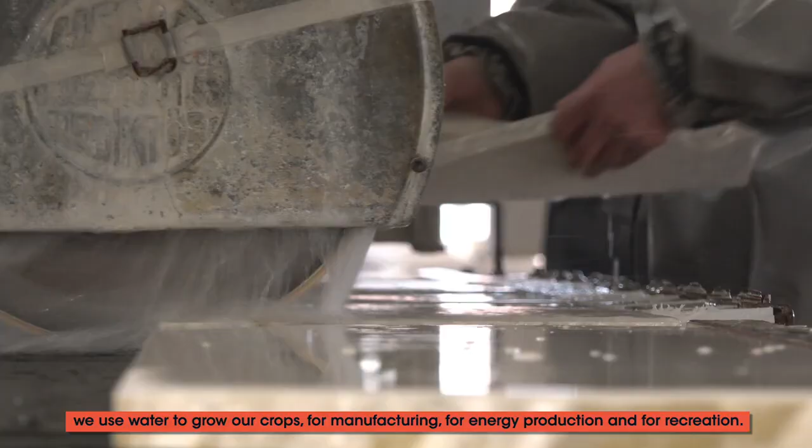Access to clean and safe water is essential for a healthy life and a fundamental element for the growth and prosperity of entire communities. Other than drinking, cooking and washing, we use water to grow our crops, for manufacturing, for energy production, and for recreation.

However, still today about 2.1 billion people live without access to clean and safe water.

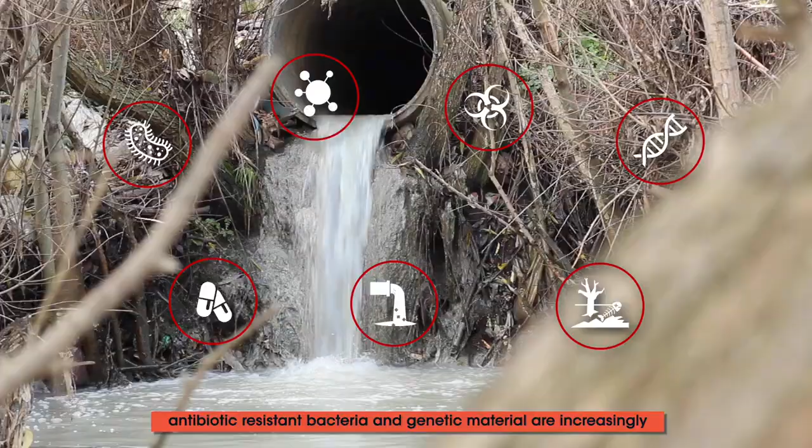Heavy metals, harmful chemicals, pharmaceuticals, nanoparticles, pathogens, antibiotic-resistant bacteria and genetic material are increasingly being detected in water bodies around the world. In the poorest regions of the planet where water treatment is incomplete or absent, contaminants can bioaccumulate in the food, the soils, and in the drinking water.

Efficient and affordable water treatments capable of removing these types of contaminants from wastewater and raw water are therefore urgently needed. PANIWATER is one of the joint European-Indian water cooperation projects funded by the European Commission and the Indian Department of Science and Technology under the Horizon 2020 programme.

18 partners from industrial and academic organizations are collaborating on the development of 6 technologies for the removal of contaminants from wastewater and raw water.

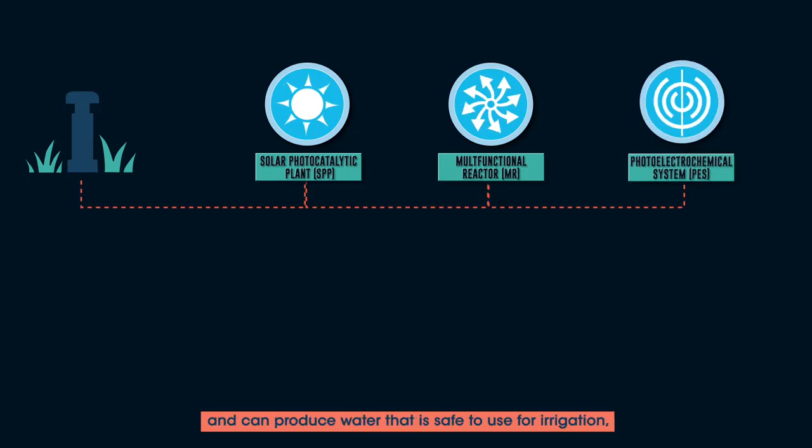3 of these technologies are designed for wastewater treatment and can produce water that is safe to use for irrigation, landscaping and industrial applications. The remaining 3 technologies are for raw water treatment and can produce water that is safe for washing, cooking and drinking.

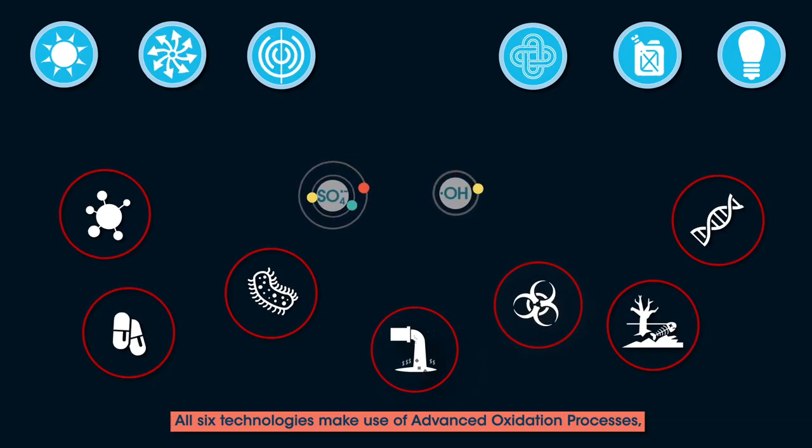All 6 technologies make use of advanced oxidation processes, which destroy contaminants by using highly reactive radicals obtained from oxygen-based compounds. In PANIWATER, those processes are triggered mostly with energy obtained from renewable sources, such as sunlight.

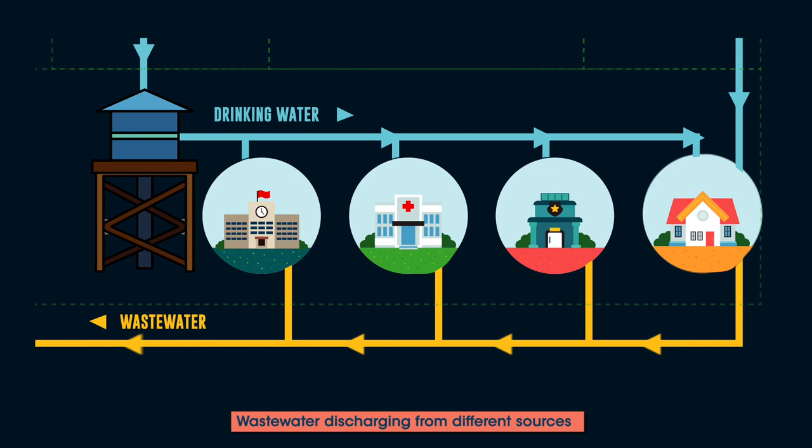Wastewater discharging from different sources such as public buildings, hospitals, factories and houses goes normally through primary and secondary treatment for removing debris and bulk contaminants. The PANIWATER wastewater technologies function as tertiary treatment to be used at the point of entry.

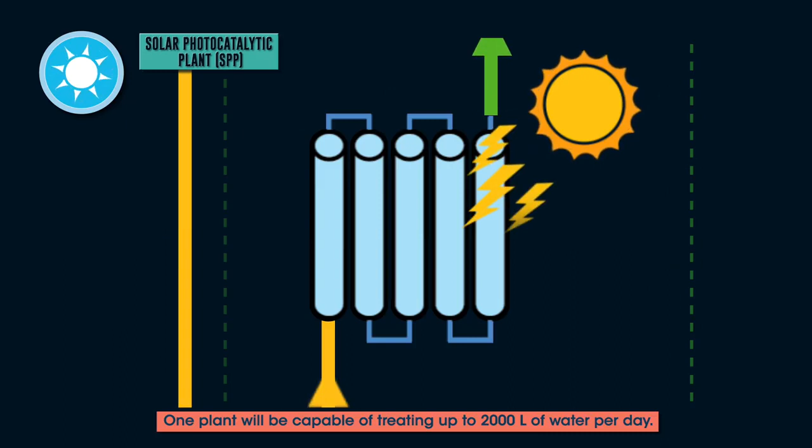The solar photocatalytic plant triggers the oxidation processes by exposing the wastewater to sunlight and consequently ultraviolet radiation. One plant will be capable of treating up to 2,000 litres of water per day.

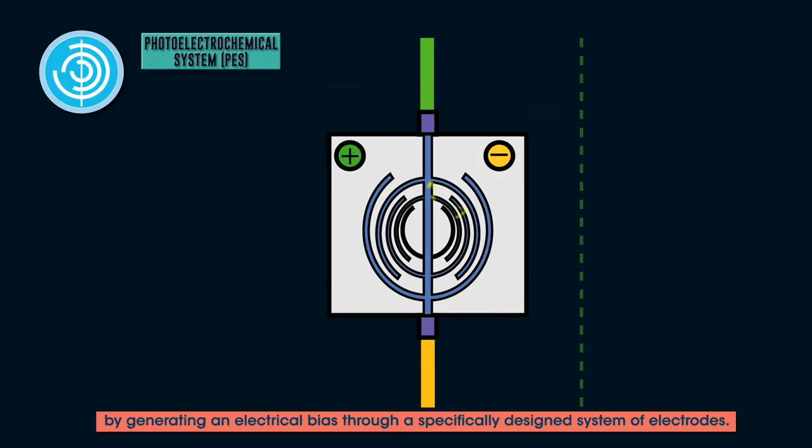The photoelectrochemical system triggers the oxidation processes by generating an electrical bias through a specifically designed system of electrodes. It can treat up to 100 litres of water per day.

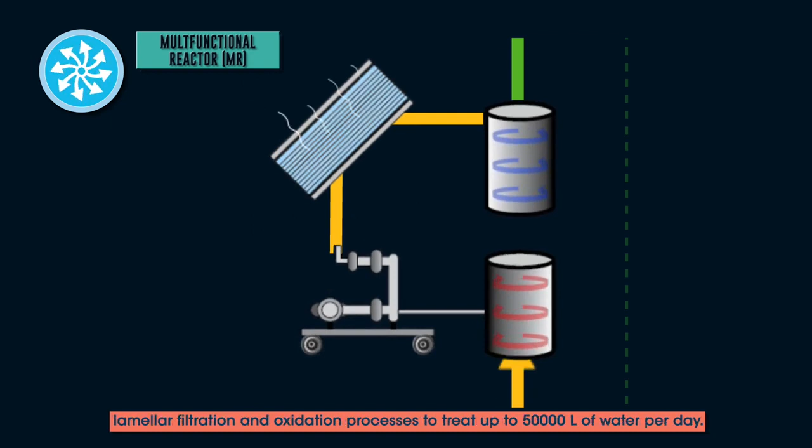The multifunctional reactor integrates automatic mixing and dosage, lamellar filtration, and oxidation processes to treat up to 50,000 litres of water per day. After tertiary treatment, the water is safe for landscaping, industrial applications, and irrigation.

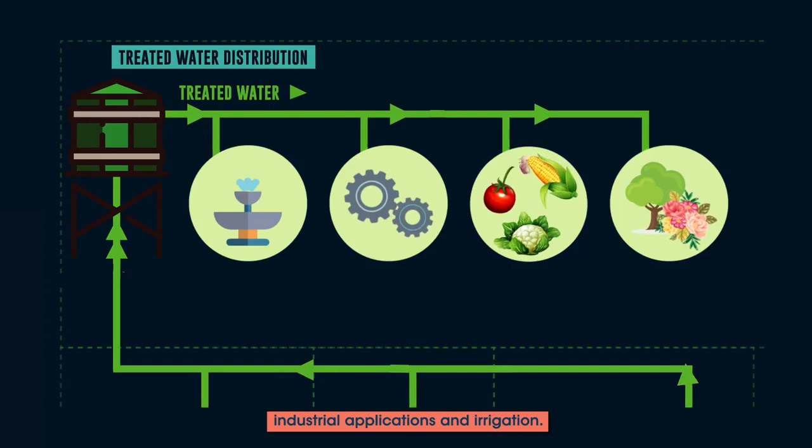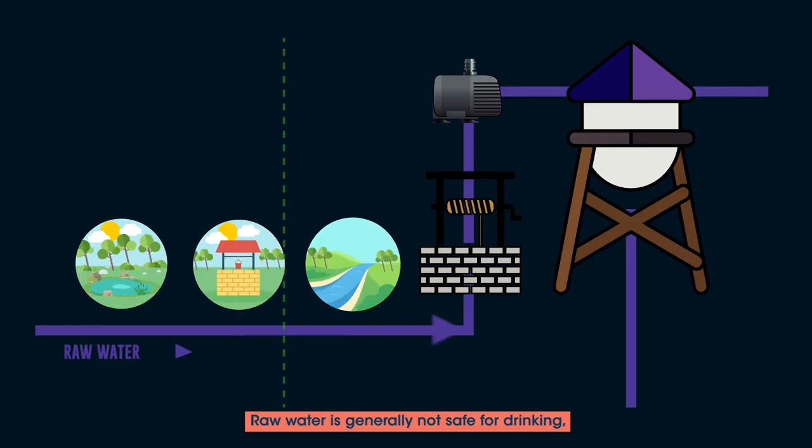After usage, municipal water goes back to wastewater treatment, while runoff from crops can make it into the water table and is added into the raw water pool. Raw water is generally not safe for drinking, especially if coming from unsafe sources such as ponds, rivers and unprotected wells, and requires treatment. There are 3 PANIWATER technologies set to do that.

The Eod system combines electrocoagulation, oxidation and chlorine disinfection to produce 2,000 litres of drinking water per day.

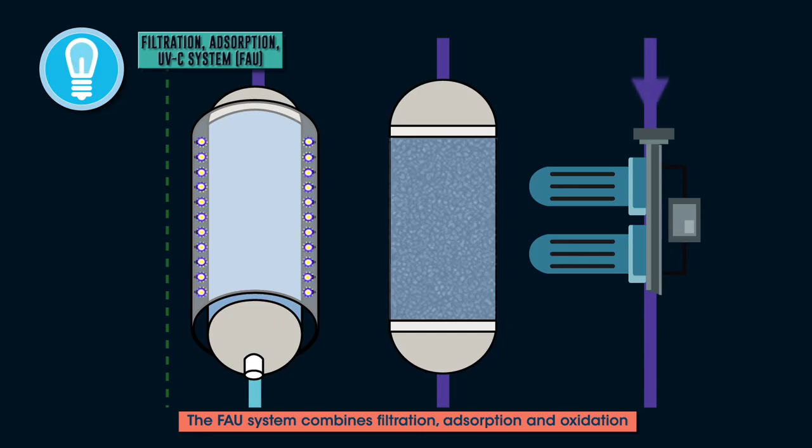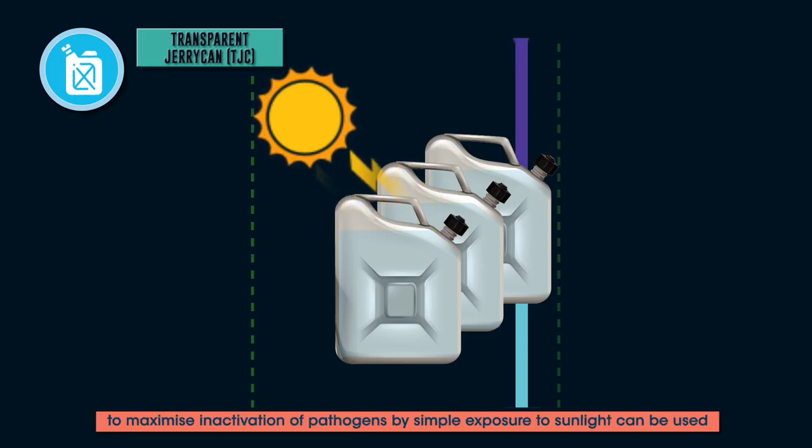The FAU system combines filtration, adsorption and oxidation by exposure to ultraviolet LED light to produce up to 300 litres of water per hour. Finally, transparent jerry cans made of materials suitable to maximize inactivation of pathogens by simple exposure to sunlight can be used as an affordable solution for household water treatment and safe storage.

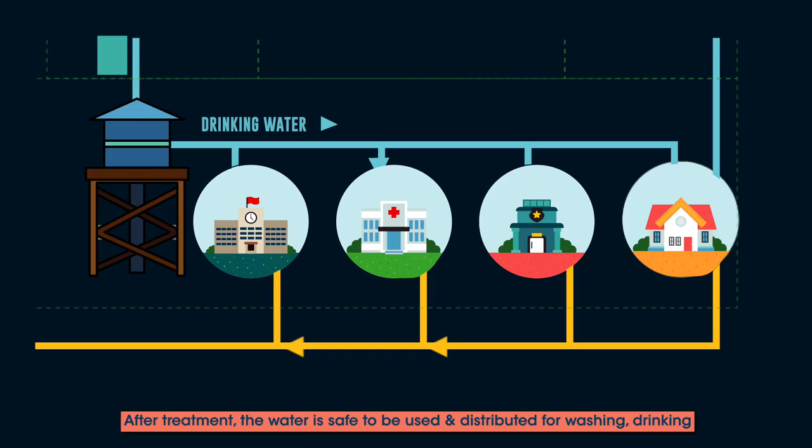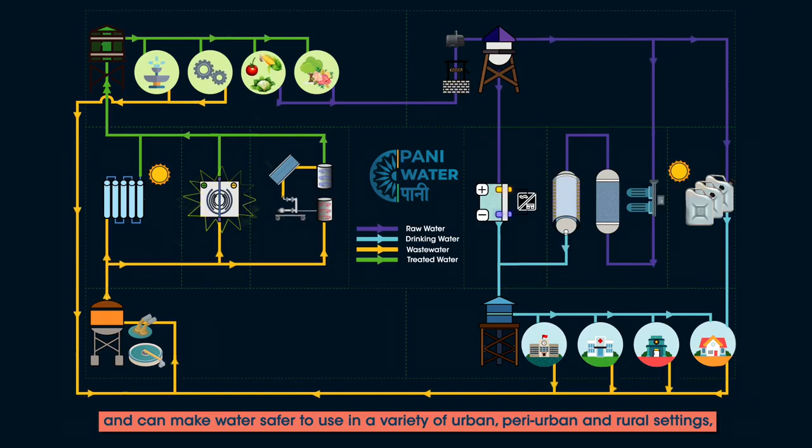After treatment, the water is safe to be used and distributed for washing, drinking and cooking in communities and individual households. Altogether, PANIWATER provides an integrated approach for water treatment at point of entry level and can make water safer to use in a variety of urban, peri-urban and rural settings, including in resource-poor regions.

The technologies are being tested in water-stressed peri-urban and rural areas in India with the support of the local communities and through participation of expert social scientists.

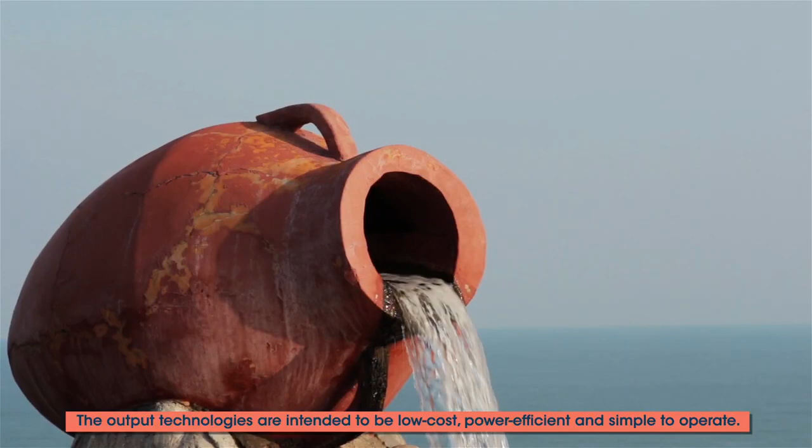The output technologies are intended to be low-cost, power-efficient and simple to operate. Their successful dissemination can contribute to strengthening the local economy and improving public health in low-income communities in India.

The United Nations recognizes access to safe and clean water as a human right. PANIWATER is a step in transforming this idea into a reality for everybody.